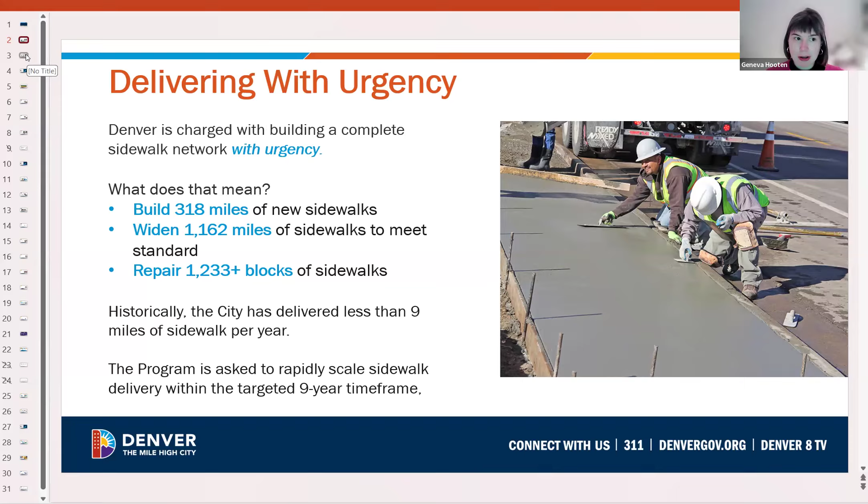So let me dive into what this looks like, the results of what we've done in 2025. And I will also caveat this by saying the data coming in right now is still being parsed through. A lot of data came from our permits that go through private development, and in many ways those permits are great but very imperfect. So we're still working through this data to make sure we have an accurate result for 25. I'm going to share these numbers, but just know that some of them are probably going to tweak a little bit.

In essence, we built over 8 miles of new sidewalks. These are delivered projects by DOTI and by private development. We widened just 0.2 miles, so lots of room for growth there. And then we repaired or replaced over 70 miles of sidewalks, a combination of spot repair, private development, and DOTI projects.

So, including in the new build, here are some examples of really lovely new sidewalks that were built through private development, and also an example of a sidewalk that was built through a library branch project.

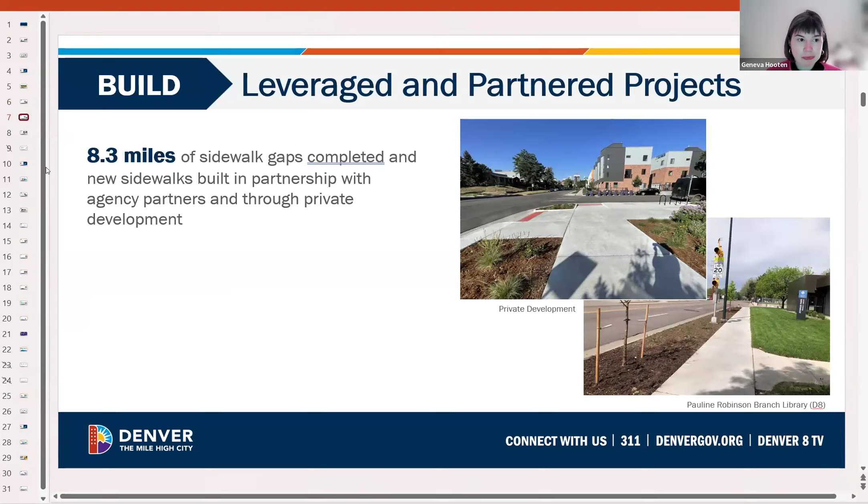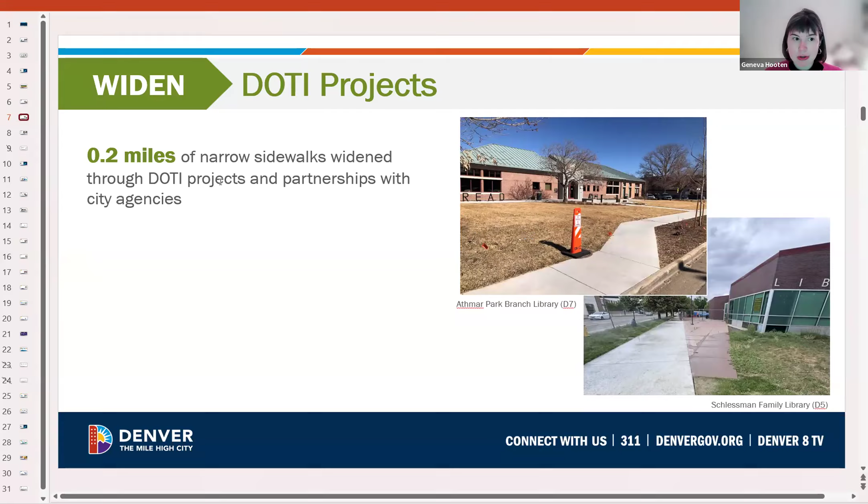Here again, we have some examples of widening. This number, 0.2, not great. I know that we have a lot of work to do in this area. So far, based on the program setup, the projects completed this year were ones already in the mix and moving forward. For instance, Athmar Park Branch Library, where that new sidewalk is widened and establishes a new tree lawn. Through spot repair and private development, we had a ton of mileage.

I'll start with private development. This is when we have private developers coming through and repairing or replacing sidewalk, which is amazing. This is a significant number of miles for us and is good for the city. It's good for the program because that means we have sidewalks that are now up to snuff and repaired.

We repaired over 5 miles of sidewalk through the spot repair. That number in some ways might look small, but if you think about it as a panel here or a segment of panels there, it's actually work across a huge part of the city. That includes work done in Berkeley, Sloan's Lake, Cap Hill, which we're still finishing, and we'll have some Cap Hill numbers to report for '26, and then about a mile in some other areas.

The 2025 work plan was set based on 311 reported damage and areas of high concentration of pedestrian activity. I think that was a really good approach for '25. For 2026, we're looking to do this in a slightly different way, looking at a different analysis that makes sure we're not just relying on 311 data, knowing that's an imperfect way. We have lots of folks in the city who have damaged sidewalks that aren't going to be submitting 311. So we're working on that, setting our work plan for '26 and we'll move forward.

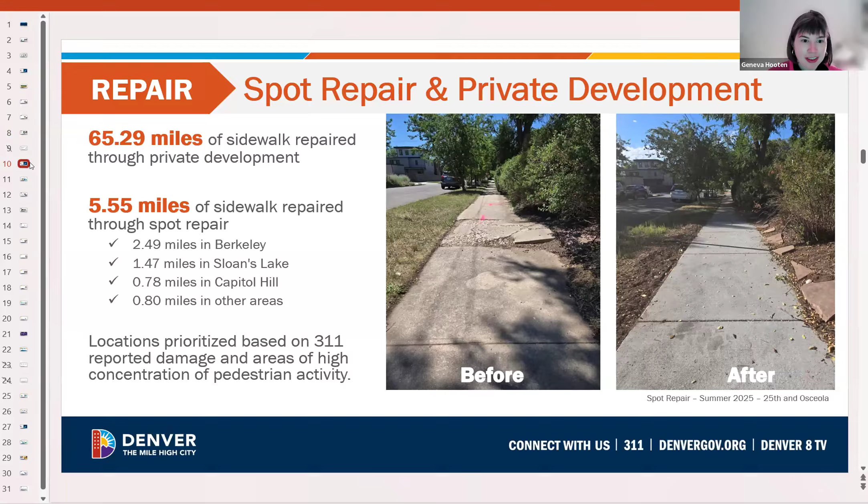So, where are we going? Let me say as well, the work accomplished in 2025 is all that will be summarized in our first ever annual report, which is due next month. As we're working through the data, summarizing what was accomplished and establishing our '26 work plan, that's the kind of content that's going to go into that.

We will be working with the DOTI advisory board this month and next month, and then it goes to the DOTI advisory board for more formal comment, and then we'll publicize it. I truly can't remember if we're publicizing it at the end of February or very beginning of March, but relatively soon.

Looking at 2026, our budget this year, very similar to most budgets, is split between 3 different categories: capital maintenance spend, capital discretionary, and operating. We still have this very clear and urgent purpose to build, widen, and repair sidewalks. Maybe not as important to you all, but very important to me in my day-to-day is how do we do this? What are our contracting mechanisms?

So we have on-calls, we have integrated construction contracts, which is an alternative delivery, and we have other construction on-call contracts. This allows me and allows us as the city to make sure that we can be actually scaling and delivering this work. I'll go more into some of the details.

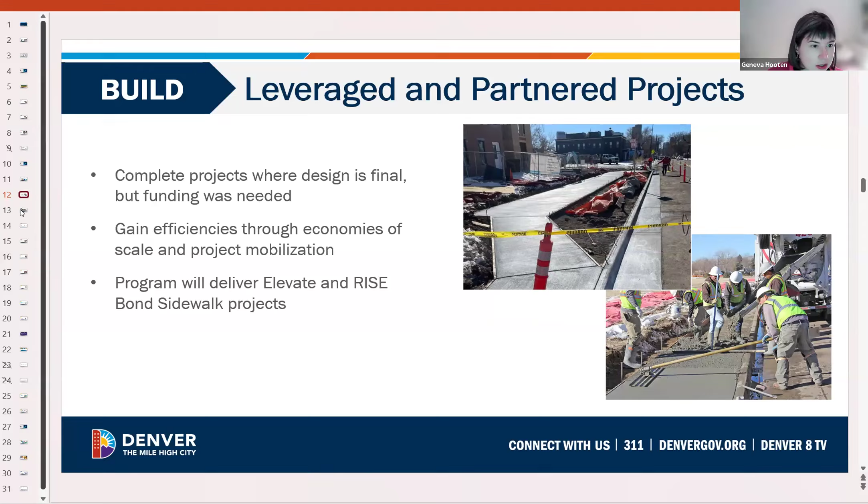So the other exciting thing that we're going to be working on next year is a pilot of field fit construction. This photo, I think there could be better examples of sidewalk projects that aren't great field fit options, but this is one that gives us, at least on two sides of the street, a different view.

In essence, where we're trying to go is to say, we know that there are tons of sidewalks that need to be built in the city. And many of those projects have long design timelines, whether that's because of complicated design, complicated drainage, establishment of curb and gutter, utility relocates, or right-of-way acquisition, which takes a long time. There are a lot of reasons why sidewalks are tricky to build.

On the left side of your screen, you'll see that, in fact, it does appear that there's sufficient right-of-way, but we have a big utility pole and maybe some additional drainage challenges. On the right side, we have almost no existing landscaping. We have sufficient right-of-way, and it's a pretty straight shot.

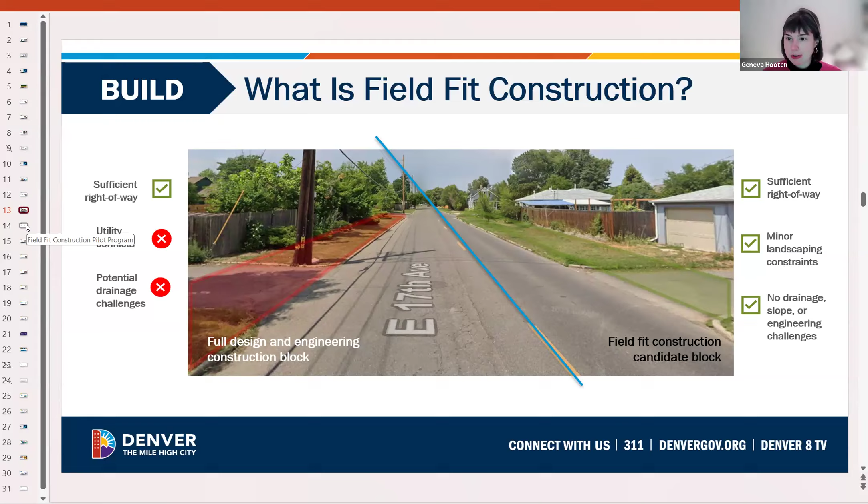So this is one where we probably don't need to go to 100% design and instead can go to a 30% design or something less than 100, and allow our contractors who have the expertise in how to do this to install. There are lots of advantages to this. Again, it's not for every project. There are a million good reasons why we still need to go to 100% design on a lot of projects.

But this year, while we're working on a whole citywide approach, I want us to be testing this. So where we're going is we are piloting and first going through an analysis. We're taking all of the city blocks and all of the city characteristics that we know and saying, could these be good field fit candidates?

And then we're running through, like, some of these have fatal flaws. They're not great candidates. Some are. And then we're going to identify some segments and work to move those into 30% design and into construction this year. This is going to allow us to learn institutionally how that's working, where we think it's a good field fit candidate and it's not, etc. So this is going to be an exciting approach to how we're going to be delivering and building new sidewalks in 2026.

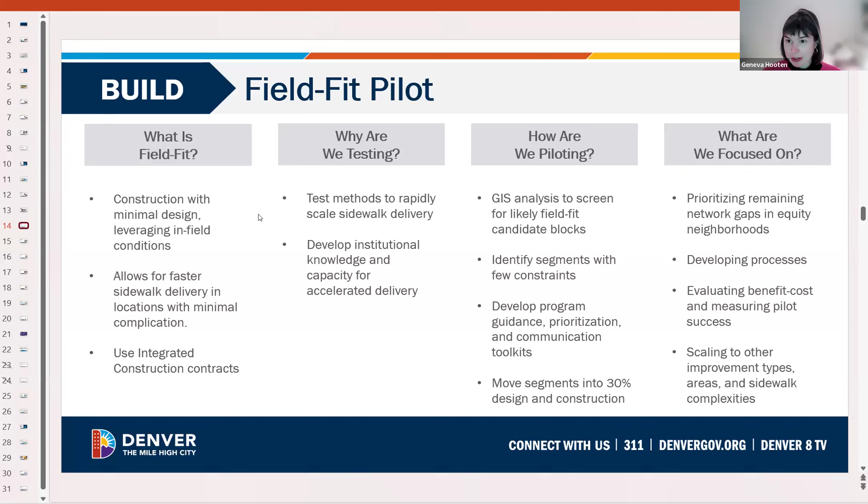And then the other big piece of where we're working next year is improving and expanding upon our spot repair. These are a couple of photos that I took in District 10 in December. So this is an example of some of the spot repair work that's been going on.

In total, in 2026, there's almost 8 million allocated for spot repair. It's more budget than this past year, with a slightly different approach to how we're going to be prioritizing. Some of this is going to be on an individual spot repair contract, and some of this is also going to be part of a new leveraged approach.

So many of you are familiar with the fact that DOTI, the city, are replacing curb ramps across the city to make them ADA compliant. In instances this year, that work stopped at 15 feet from the curb. And we know that there are often broken panels of sidewalk that happen at feet 16 to 25. So while our teams are already out there doing the work, have already mobilized, have already done all this, that's also going to be an opportunity for additional sidewalks to get fixed along with that.

So it's another pilot approach that we're testing out for this year. I think it will allow us to get more done faster and is going to help in overall fixing more sidewalks quickly.

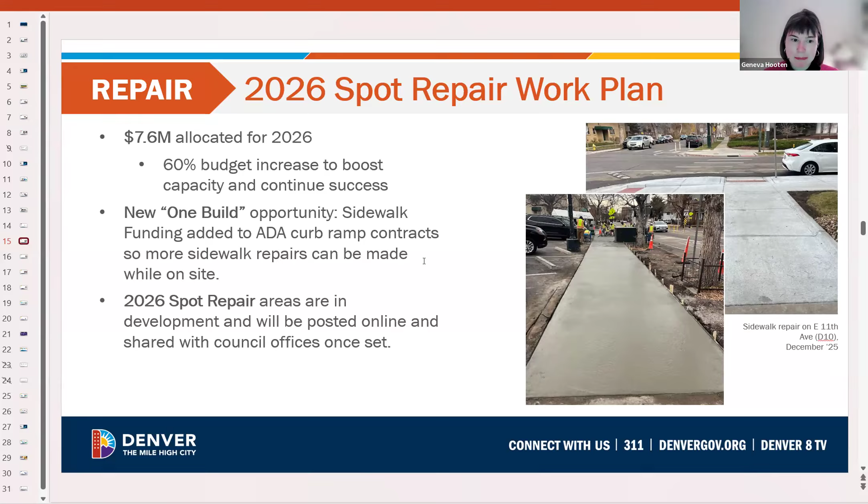Then this is mostly just for fun. I'm sure many of you have seen on sidewalks across the city and in your travels stamps. It very often includes the contractor, sometimes the city, and then the year that a sidewalk was installed. I love these. I think they're great. It shows, you can see like, wow, that sidewalk has been here since 1955. That's very cool.

So we will be launching a public art contest, soliciting feedback and submissions from the public. This is not just for professional artists. This is for students. This is for anyone who wants to participate. It's an open call to all community members.

It will go through a selection process, and then we will have a sidewalk stamp that we can use. This will make it so that when we are fixing a sidewalk, building a new sidewalk, it has that stamp that shows everyone who is walking or rolling on that sidewalk that this is part of the city's sidewalk program, and it'll have the year that it's installed. So more to come on this, but this is one of the things that we're going to be working on this year.

And then the other really big effort that's happening concurrent with all this good design and construction and spot repair is the sidewalk implementation plan. This was called for via the original ordinance, and it's called for in the code. In that language, it says sidewalk master plan, but we're getting away from that and instead calling it the implementation plan. This asks where, when, and how we are going to be addressing all the sidewalk need in the city.

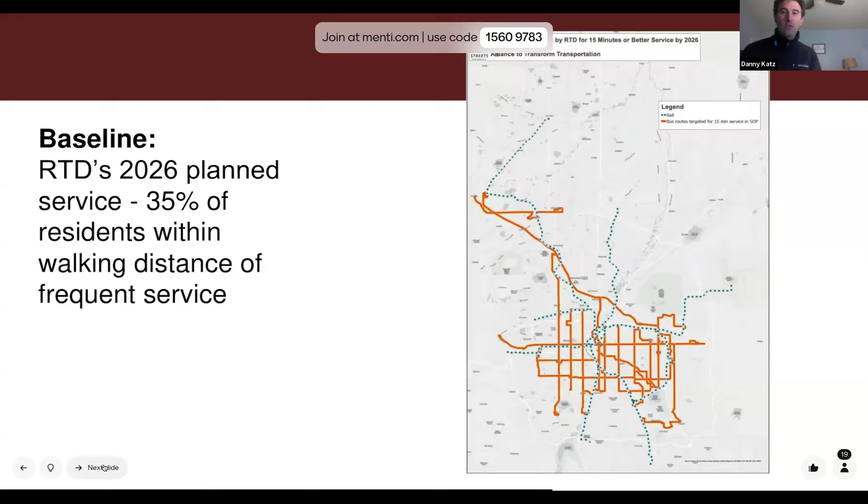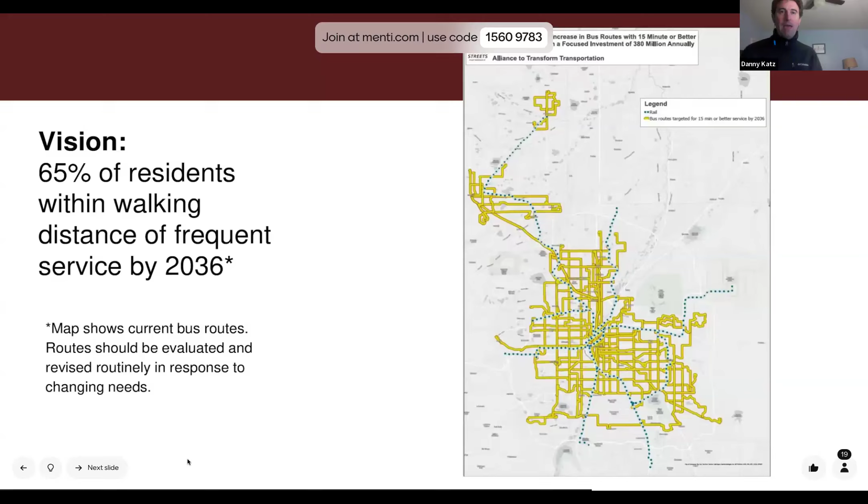If you go to the next slide, you'll see what it would mean if we had twice, if we had 65% or twice as many people having access to that frequent service. And what's probably best is comparing the two. So if you go to the next slide, you'll see them next to each other.

And so you'll see the yellow lines, there's just a lot more of them. And that's the point here. We're trying to say we need a lot more lines on the map that are coming 15 minutes or better. Don't try too hard to figure out exactly what street those lines are. We are not bus designers.

I would point you to our incredible colleagues at Greater Denver Transit, because they are doing a lot of really good analysis to figure out, okay, how do we maximize bus routes, bus systems? Where should those bus lines be going? We just took the current RTD map and colored in more of the lines just to try to indicate what's the extent of the reach if we did it today.

So don't worry too much about literally where those lines are, but you can see every part of the region, a lot more lines, especially in the Denver core where we're at, as well as out in Aurora. I mean, really the whole area, you can see a lot more of the frequency. So this is kind of a way to try to envision what's the scope, how many more lines on the map, what does that actually look like?

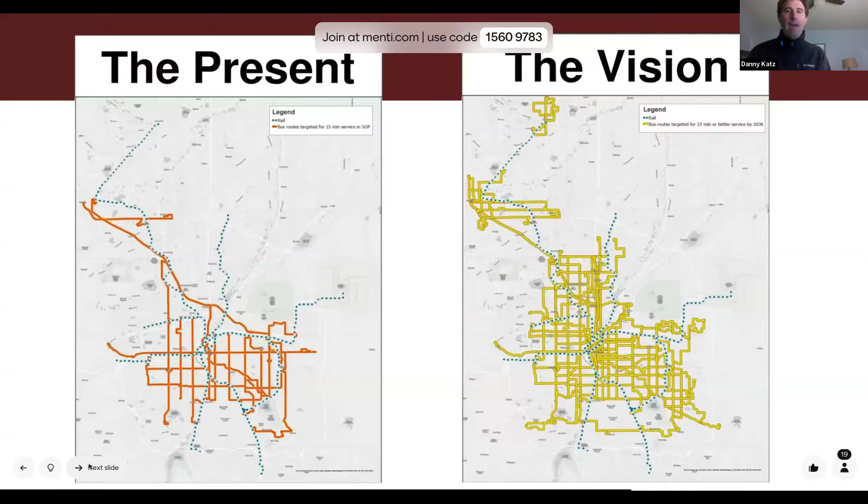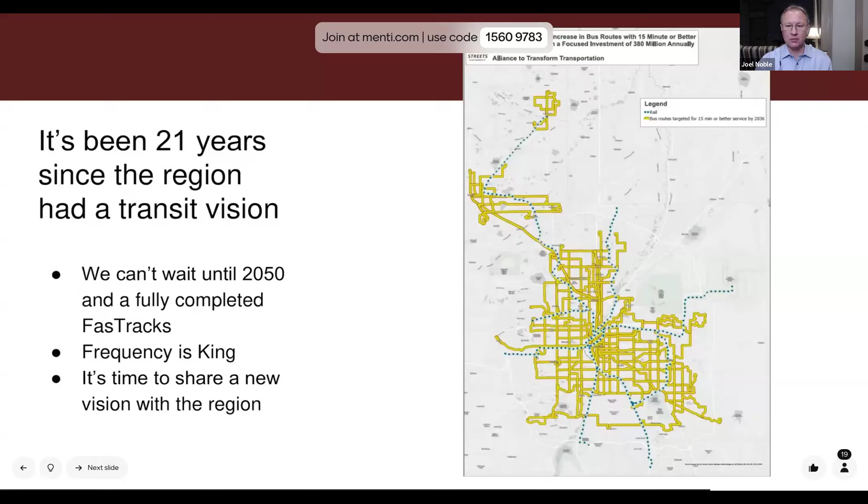So we have about 7 people who have voted so far. If you're still in there, if not, the code is up at the top. It'd be great if you could leave this up while Joel starts sharing some questions from the audience. Yeah, go ahead, Joel, if there's questions.

Yeah, we'll start at the bottom. Lucia had a question about resources. So right now, RTD has a tremendous difficulty finding and keeping bus drivers. It's a stat that gets reviewed every month, and it's not really getting any better. So with the increased frequencies, if we don't have the labor pool now, how are we going to have the labor pool in the future for these increased frequency routes?

Yeah, so every one of those routes will take people. We can either say there's no way we can recruit more people, so there's no way we should pursue this vision—or we can go, there's got to be a way to find more people, there's got to be a way to make this job something more people would want to do and more people would want to stick with doing it.

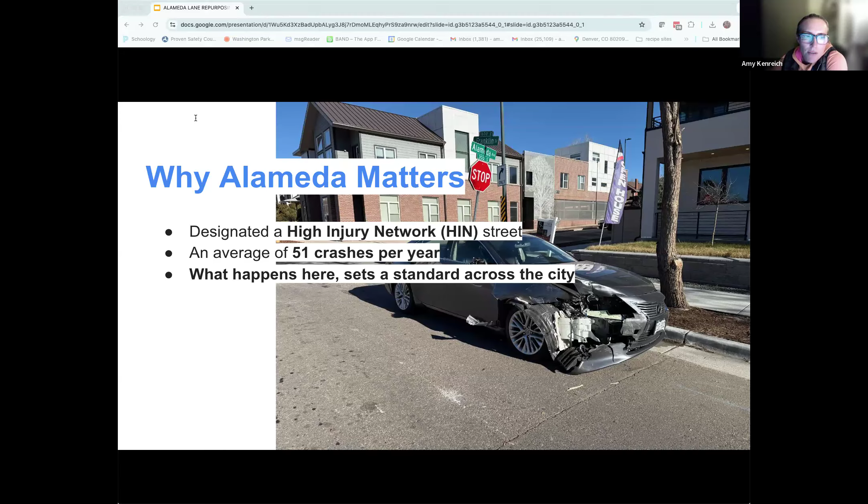Why does Alameda matter? Why does this project matter to us all? There's significantly more crashes than comparable high injury network streets. For example, Evans Avenue, Lincoln to University, has half as many crashes as Alameda in the same span. Residents along Alameda have experienced cars crashing into homes, children have been struck by drivers, and there's chronic speeding and reckless driving. It's been unsafe for decades. What happened here was 5 years of feedback supporting the original design was effectively discarded. If we can't stomach improving safety on Alameda Avenue through Wash Park, then we're not going to get it anywhere else in our city.

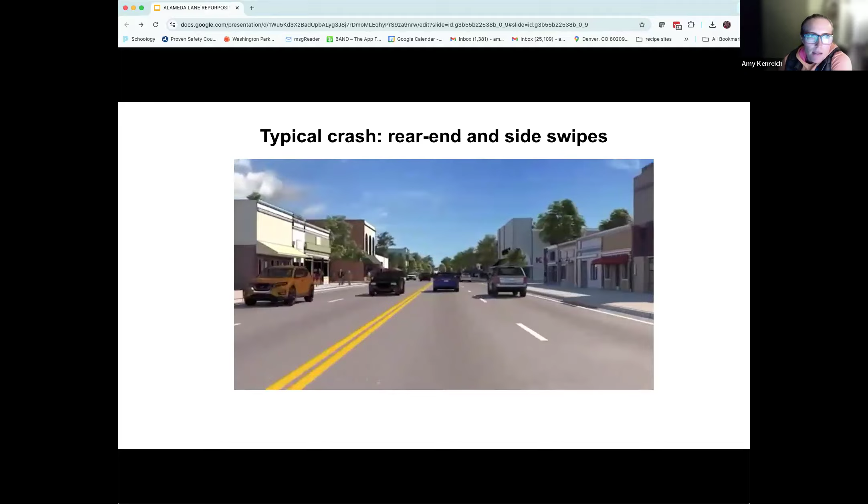Here are two typical crashes. First you'll see a rear end, and then a side swipe right after that. These are examples of crashes happening today on Alameda Avenue. So that's the rear end and the side swipe. The side swipe happens pretty quick.

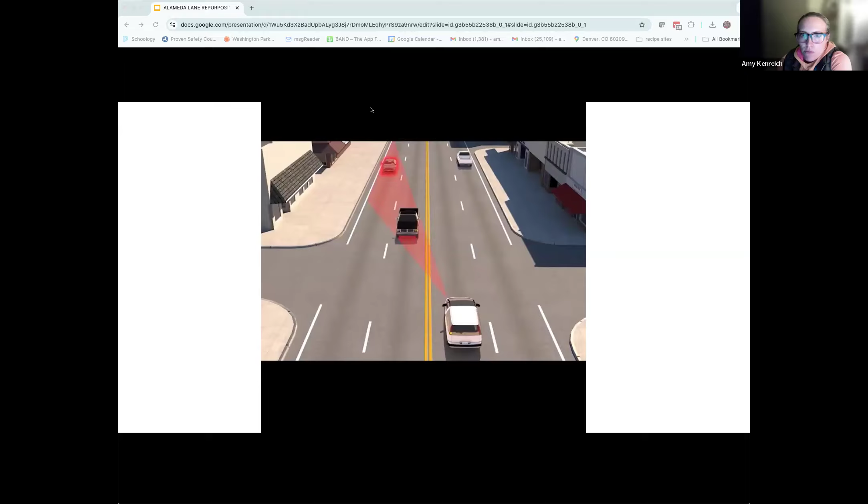Okay, and then here's the last typical crash. This one is a sightline issue. You can see this driver wants to turn left, but they can't see the far oncoming lane of traffic. So they get T-boned.

This graphic shows you the current configuration on the left, the full lane repurposing, the original project that was vetted with the community, and then the partial lane repurposing that was announced November 7th. Just to note, this road diet, the full lane repurposing, is one of the most effective and least expensive safety interventions a city can do.

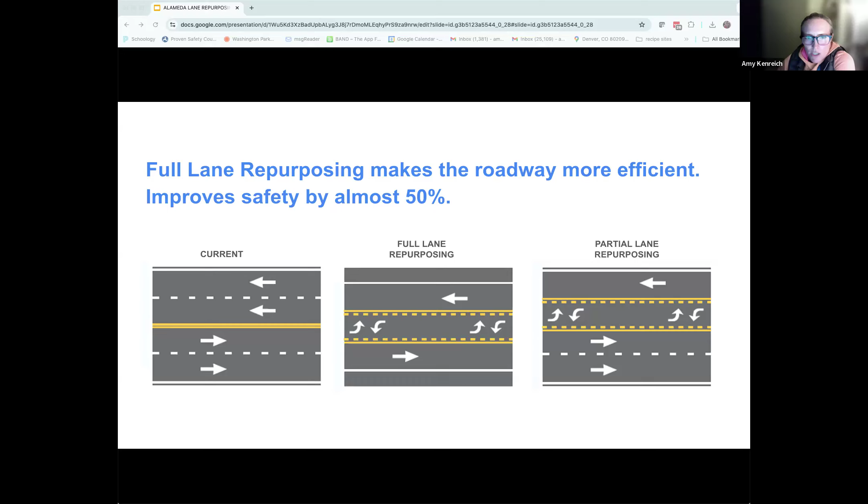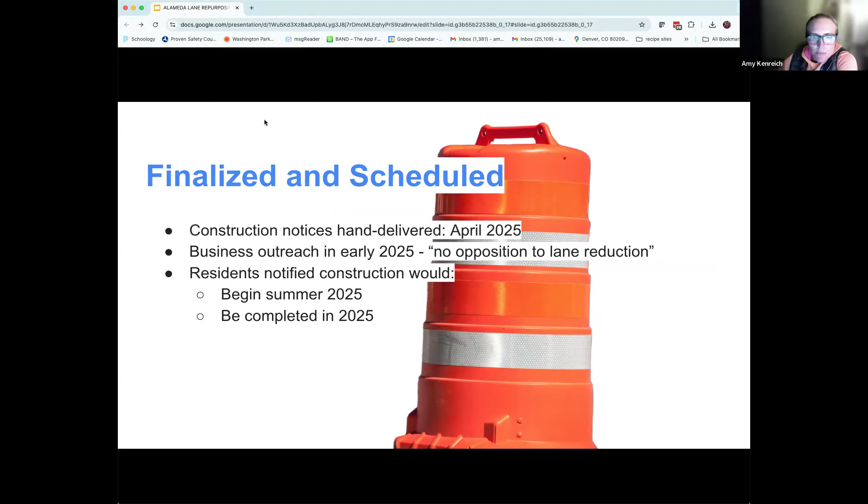So like I said, this project was finalized and scheduled for construction. Construction notices were delivered in April 2025. The city notes that they did business outreach in early 2025 and heard no opposition to the lane reduction. Residents were notified that construction would be completed in 2025.

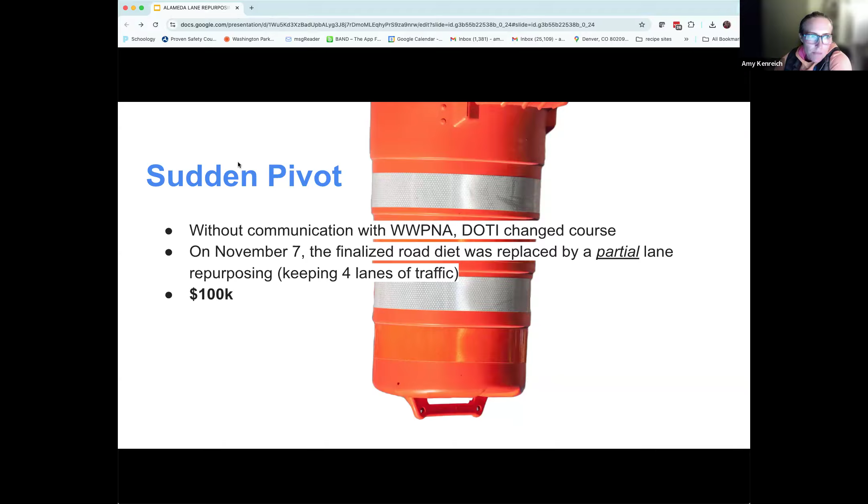But there was a sudden pivot. Without communication to West Wash Park Neighborhood Association, DOTI changed course. On November 7th, the finalized full lane repurposing or road diet was replaced by a partial lane repurposing, keeping 4 lanes of traffic. This will cost an extra $100,000. This decision was communicated with our neighborhood association via press release, not community process. This was a major change done behind closed doors.

You might be asking, what's wrong with the partial lane repurposing? Some of you might have heard our mayor - I think it was this week or last week, I'm not sure - in a 9 News story on this. He was interviewed, they were asking him questions, and he said one of his points was this is a compromise. It's a compromise in safety, is what it is.

Here's what's wrong with the partial lane repurposing. It's not a road diet anymore because 4 lanes of traffic will remain. Pedestrians will have no buffer from fast-moving traffic, the same conditions we see on Alameda today. The 2 eastbound lanes will now be free of delays from people slowing down to turn left. DOTI downgraded safety on Alameda Avenue, a high-injury network street, and created a new problem: 2 unencumbered lanes eastbound that will only encourage more speeding. DOTI didn't just downgrade safety, they created a new risk. Westbound drivers who want to make a left turn will still have the same sightline problem they have today. We saw that in the last video.

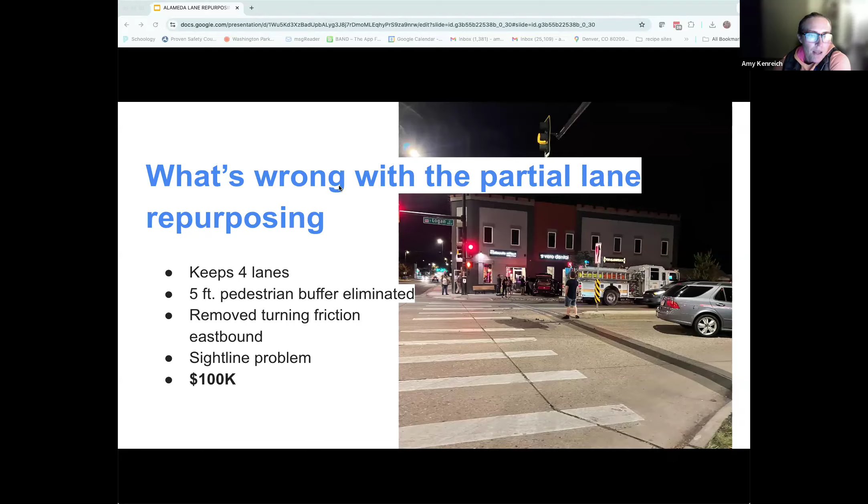In addition to the disappointment of hearing that the road diet was canceled, we've also uncovered by CORA request that DOTI has been misrepresenting some key facts. In September, Amy Ford told the DOTI Advisory Committee this project is moving forward. However, what we know is on August 14th, DOTI sent an email to their contractor, Kimley Horn, and said 'we've been working with leadership to triage some high-level community and leadership concerns and recently received clear direction on a path forward.' And that was the partial lane repurposing. So that was not true. This project was not moving forward.

In November, Amy Ford told the DOTI Advisory Committee this had nothing to do with a lobbyist. But what we know is June 9th, DOTI held a concerned stakeholders meeting with Jill Anschutz and hired lobbyist Jason Gallardo. Then this month in January, Amy Ford wrote back to the city council after they wrote a letter to her, and Amy Ford said the decision to adjust the design was made late October, early November, which of course is not true - August 14th is when they had made the decision. This is just a quote from Brett Boncour's email to Kimley Horn.

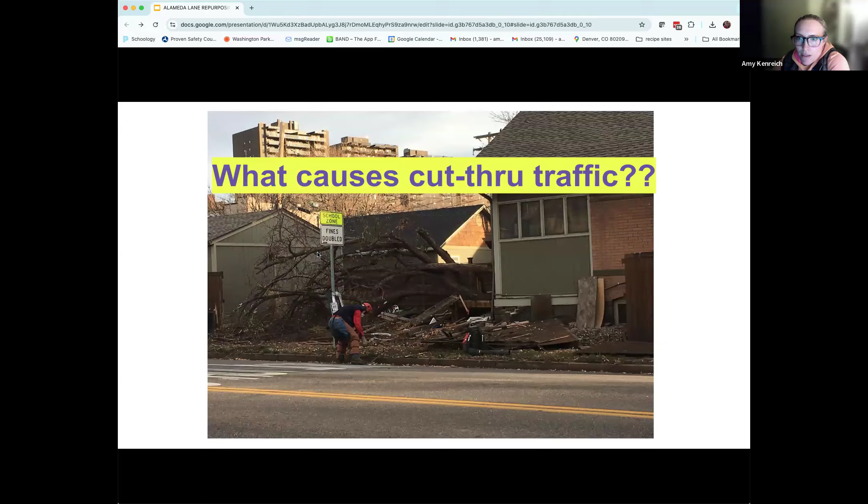Here's my question for you all to contemplate as I skip through these next slides: what do you guys think causes cut-through traffic? Do you think 51 crashes a week or 51 crashes a year might do it?

This is not an isolated case. There's a pattern under Ford's leadership.

West 29th Avenue - two miles were supposed to be a protected bike lane, but half a mile of that two-mile length was changed to a painted bike lane. South Irving Street - the protected bike lane was scrapped to prioritize parking. Market and Blake - the mayor and DOTI removed flex posts between the Ziclas. These acted as vertical delineation and visual friction. They claimed it was so people could see into the stores.

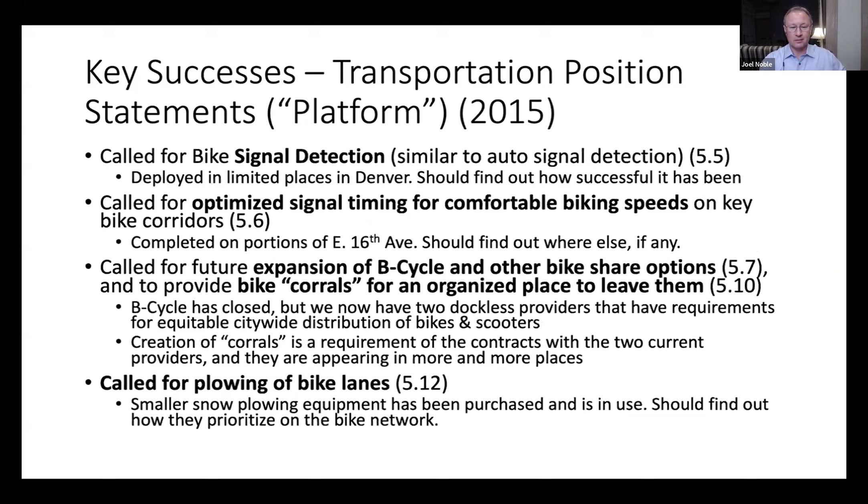The request of you all is, I'm going through some of the things in this document that we've had success on, calling for bus rapid transit corridors. Denver Moves Transit came around in 2019, 4 years after this plan, and some corridors are starting to move forward, et cetera. So it's been a successful practice, but it hasn't been successful in that we haven't done it regularly, and people have forgotten there's this consensus.

We need to go back to the neighborhoods and ensure and update this, find where the consensus is, and then repeat it, hopefully making this a more regular practice of INC. I think I've said everything that's on this slide already.

So here's the deal. On December 8th, the INC board voted to ask the Transportation Committee and the Zoning and Planning Committees to update the position statements in their areas. Over the next couple months, we're targeting bringing this back. This committee meets every other month, so not March, but May, coming back with a completed proposed set of position statements for this committee to review and vote to move to the INC delegation.